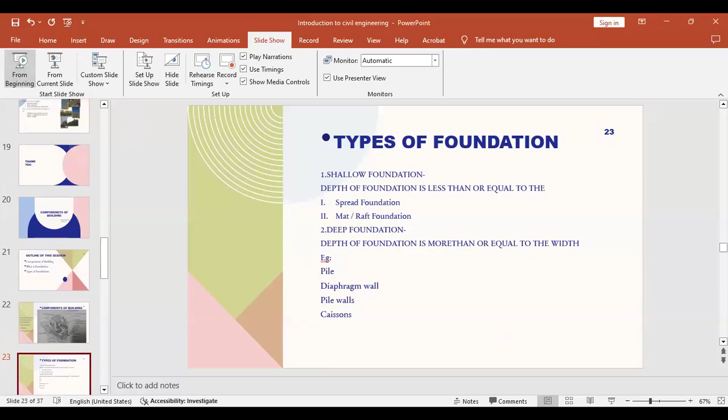Our topic is the introduction to civil engineering. In this class, I need to take two sessions. In the first session is the introduction to civil engineering.

Please mute. The outline of this session: here I am going to cover what is engineering, what is civil engineering, and branches of civil engineering.

Engineering is the branch that is the continuation of the physics, chemistry, and mathematics that we studied in +2.

In this engineering, Robert E. Dory, as per his opinion - he was an electrical engineer and AIEE medal winner, that is American Institute of Electrical Engineering - worked in 1909. As per his opinion, engineering is the art based primarily upon training in mathematics and physical sciences, utilizing economically the forces and material of nature for the benefit of man.

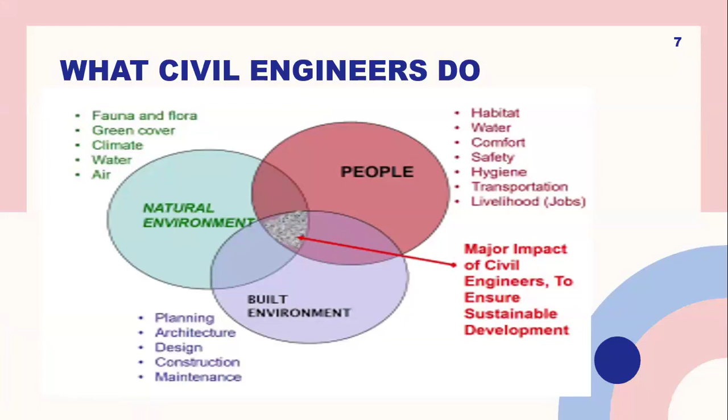So these are large structures. They add 520 kilometers of coastline to that of Dubai. The first two islands used 100 million cubic meters of rock and sand. So in the sea, islands are constructed and these islands have become building houses, hotels and so on. Civil engineering is so powerful that you can create land for living, in this case in the sea, where there was no land.

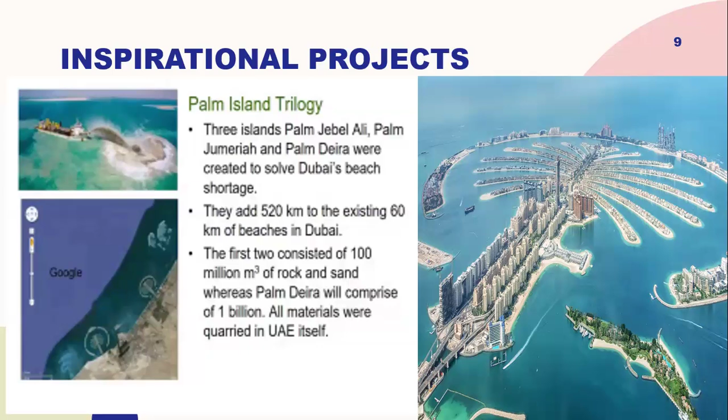Another example is Burj Khalifa and many others. We don't have enough time to explain them, so we are going to the next part of our session.

In the introduction of civil engineering, I explained the requirements and the need of civil engineering. Then in civil engineering, nowadays several branches are offered. The main specializations or main branches of civil engineering are: environmental engineering, geotechnical engineering,

Environmental engineering explains how we interact with the environment and how we should take care of it. These are the things that happen in environmental engineering.

The next one is geotechnical engineering. It covers the soil and the ground. Next is hydraulic and water resources. This deals with the flow of water, how we can control, save, and utilize water more efficiently.

Then the next one is construction material and technology. They look at what is used in construction, what technologies are available, and how construction is carried out efficiently.

Next one is structural engineering. This is a core paper of civil engineering. Structural engineering deals with the design and analysis of structures that we want to construct. It is very important in this stream.

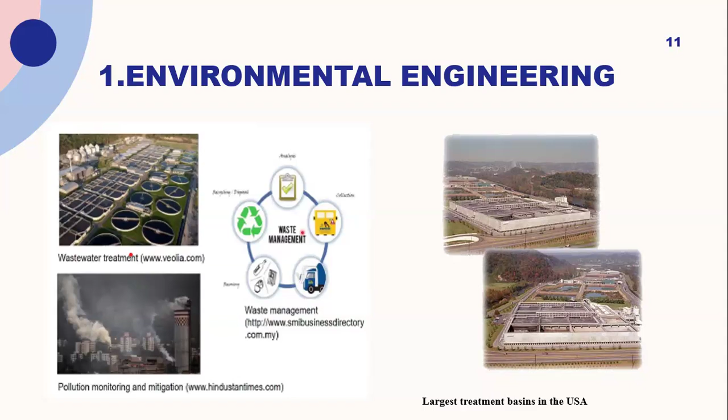In environmental engineering, all this is aiming to protect and improve the natural environment. It draws upon basic sciences like chemistry, biology, and fluid mechanics, because these are the sciences required

for designing and operating the systems that have to be built for providing drinking water and for treating waste, municipal as well as industrial waste. Depending on where the waste comes from, treatment may be different. We have to see how the contaminants can be treated or handled before the treated waste is sent back to the environment.

This also brings up the importance in civil engineering of knowing chemistry.

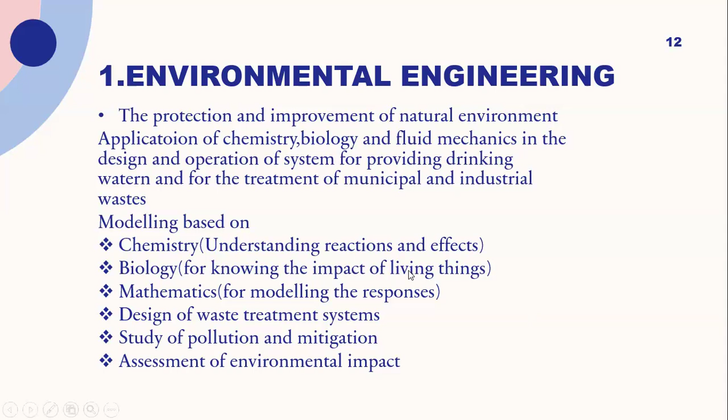Anyway, we have to understand the soil, we have to understand the rock, and we have to see how to make this tunnel safe. We are drilling and boring, and also during its life, it has to be safe enough and should withstand the pressure of the earth around it and the movements and so on.

And whenever we have a large building or a high-rise building, you need a strong foundation. I want to explain about the aspects of geotechnical engineering. First, I just mentioned tunnel engineering.

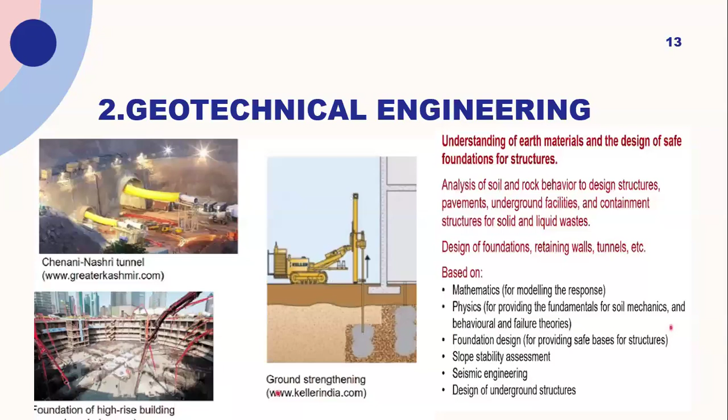Now I want to explain hydraulics, the water resources engineering. There are large structures like dams that have been built over the course of history. We still build large projects involving dams where water is stored for irrigation purposes, drinking water purposes, and also to generate electricity. It is one of the cleanest ways to generate electricity.

We have several large hydroelectric projects which provide pressure due to the buildup of water that can be used to generate electricity. These are all massive projects because they involve making a huge reservoir that can collect the water, and the impact on the environment and people is tremendous. So they have to be done properly and safely.

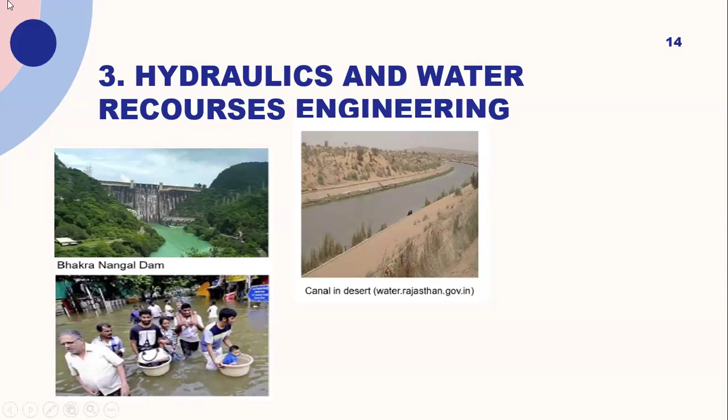We can come to the area of construction. Construction involves resources, materials and processes. So the people who are involved, the construction materials experts, have to decide the material to use, how much to use, and how. This is mainly a kind of management - construction working, material management, and time management.

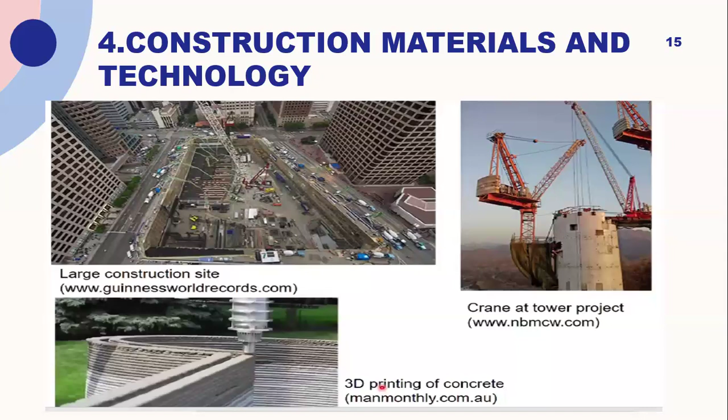So we do not need a mold or a form work - you can just pour the concrete and it stands up in the required shape of the structure. This was coded before - this is being done in polymers. In this type of concrete 3D printing, it is also being done with metals and some other kinds of materials. It is a new technology of construction based on reducing manpower and construction time in an effective way. I think all of you have heard about this technology of 3D printing.

The next stream of our branch is structural engineering. When we have to design the structure, we have to look at the people who take care of the foundation and people who have taken care of the material and processes. Now we have to design a structure - like this high-rise building or this bridge across the Yamuna River in India. This bridge is a cable stayed bridge, where we have a deck over which traffic is flowing, but the deck has to be kept across the river, and we have cables which are holding it up. These cables are tied to this huge tower, which is above the bridge.

We can have a steel bridge as well. This is very elegant. The next example is the Howrah Bridge, another bridge in India, Kolkata, which shows an entire steel bridge—it is a skeleton structure, steel that is holding it up.

These are things which are very impressive. They could be tens, if not hundreds of meters tall or long, and they have to be designed in a safe way to last for a long time. This is what the structural engineer does: analyzes the forces, stresses, and deformations, and

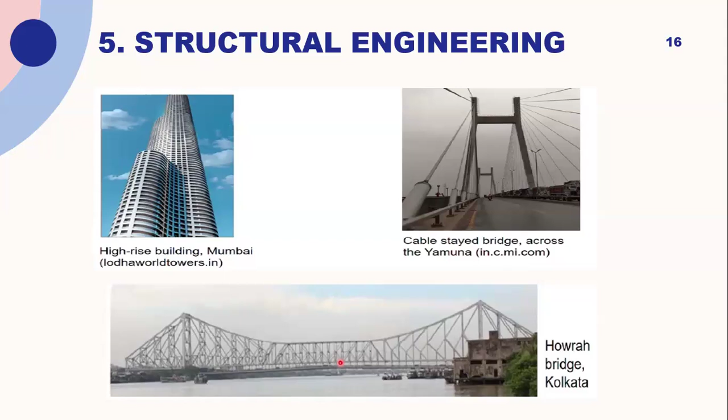And when they last, we want to make sure it is functional. Next stream is transportation engineering. Transportation engineers design and analyze highways, railways, airports, urban and suburban road networks, parking, and traffic control signals.

It is very important—there are different modes of transport. In every nation we have a national highway network where several thousands of kilometers connect different corners of the nation. Similarly, roads provide modes of transport, and waterways also provide a way of transport. Canals and waterways are a mode of transportation because we can transport goods very easily and cheaply by waterways, without competing with the transportation of people. This could be a mode dedicated to the transportation of goods.

Airport construction in remote, hilly areas is difficult to do, but it is important for providing a network for moving people, moving goods, and keeping business and life going.

Next stream is construction management. Construction managers mainly review contracts, order materials, hire and schedule subcontractors. Their job is to provide quality control and ensure the project is completed on time and within budget. Time, schedule, and budget are very important in this area.

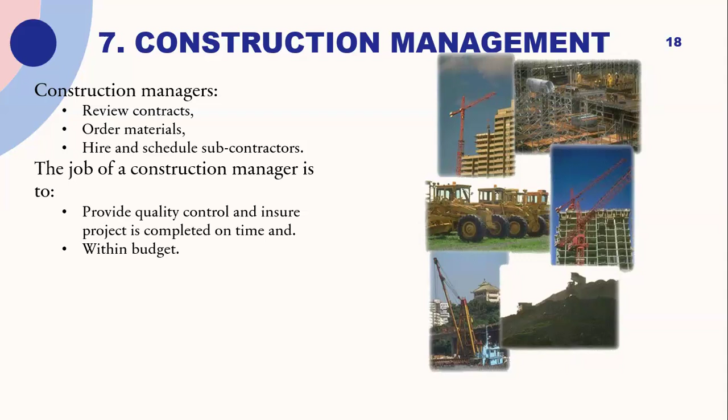In this session I completed the main areas, introduction and main streams. In the second section, I want to cover a small area: the components of buildings, because civil engineering is really connected with building construction. I want to explain some points—components of a building, what a foundation is, and the types of foundation.

Mainly a building consists of three parts: first is the foundation, second is the plinth, and then the superstructure. We can see this figure—this area is the plinth. The area below the ground level is called the foundation, and this is the floor level.

Can you see in this figure? This is the floor level of a building, and this is the ground level of the building. This height is mostly 45 or 60 centimeters as per the requirement of the building—this is the plinth area. The part of the building below the ground level is called the substructure, and the part above the ground level is called the superstructure.

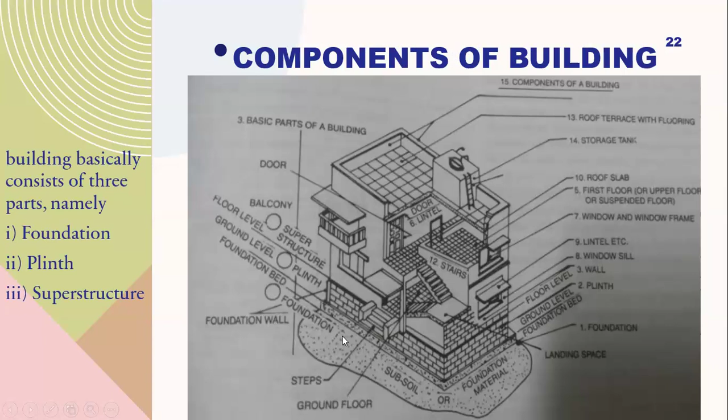Now we can explain in this session the foundation. Foundation is mainly of two kinds. The first one is the shallow foundation, the second one is the deep foundation. Shallow foundation is the foundation with lesser depth. Its definition is: depth of foundation is lesser than or equal to the width of foundation.

The types of shallow foundations are spread foundation and mat foundation. The deep foundation means the depth of foundation is more than or equal to the width of the foundation. Pile, diaphragm wall foundation, pile walls, and caissons are examples of deep foundation.

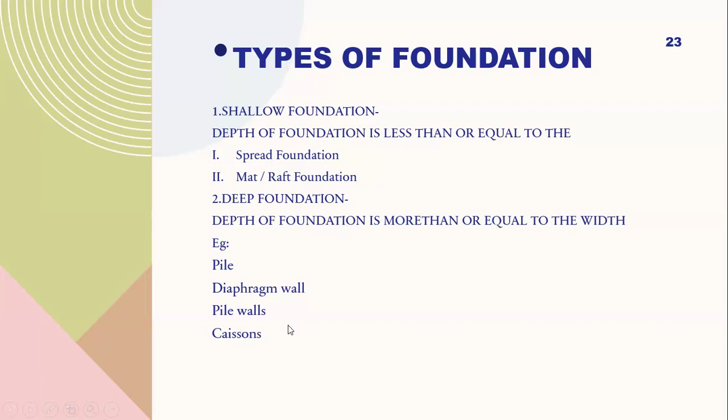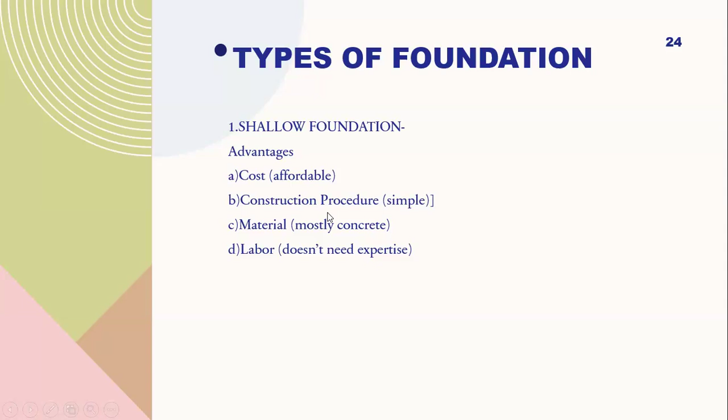The advantages of shallow foundations are: cost must be affordable, its construction procedure is simple, mostly it is concrete, and it has lesser labor requirements.

This is the example of shallow foundation. This is a spread footing, also known as footing. It is the enlargement of the bottom of a column. This is the column - this vertical load bearing member is a column, and this vertical load bearing member is called a wall. If the column type structure is shown like this, this cuboidal or rectangular area is known as the footing. It is the enlargement of the bottom of the column. This foundation transfers the load from the column to the soil below it.

And this is load bearing. This is the spread footing. The load from the wall is transferred to the soil by this foundation.

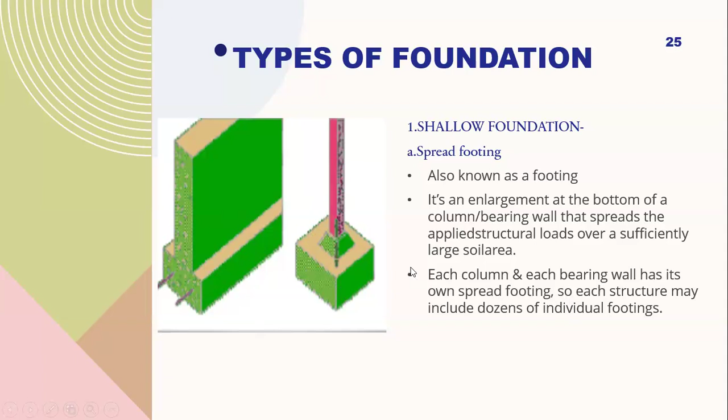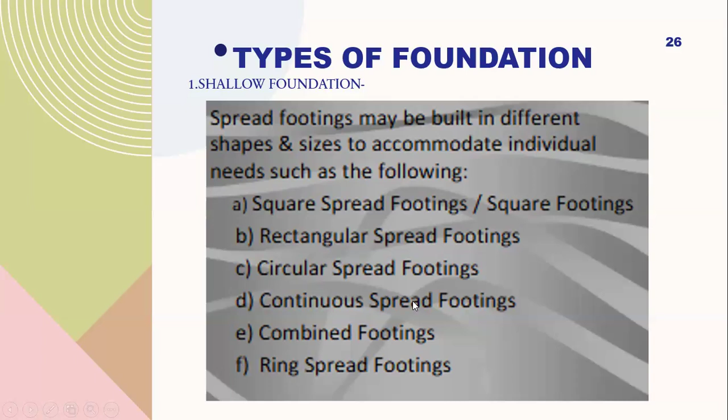Spread footing may be built in different shapes and sizes: square spread footing, rectangular spread footing, circular spread footing, continuous spread footing, combined footing, ring footing. This is a square type foundation - this is the column and this is the foundation.

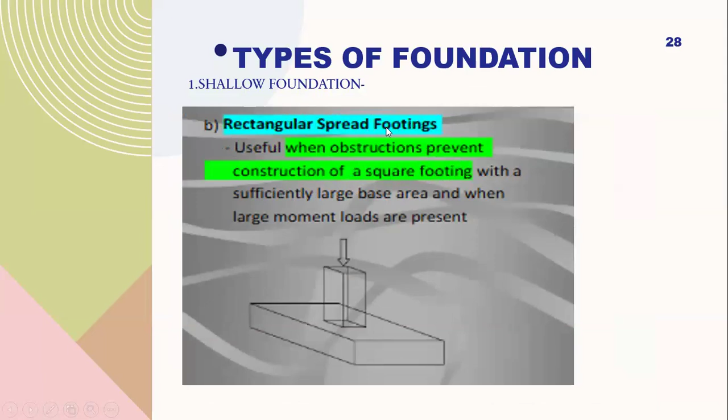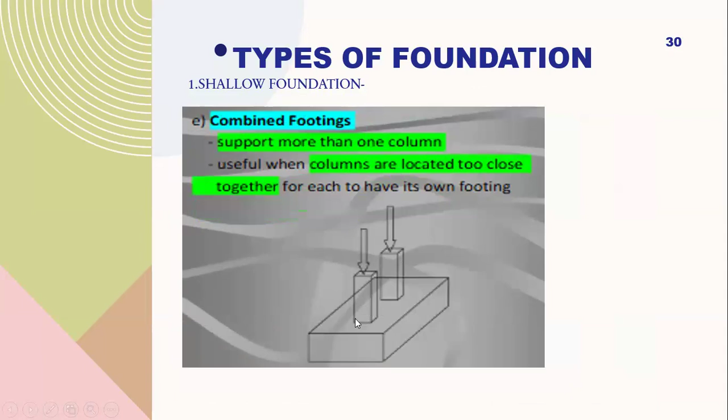Here two columns are supported by a combined rectangular area. Next one is the ring footing - this is a concrete ring foundation, and the load is transferred through this ring.

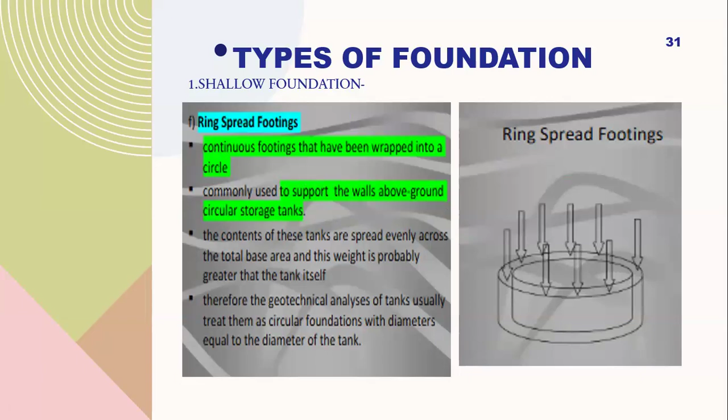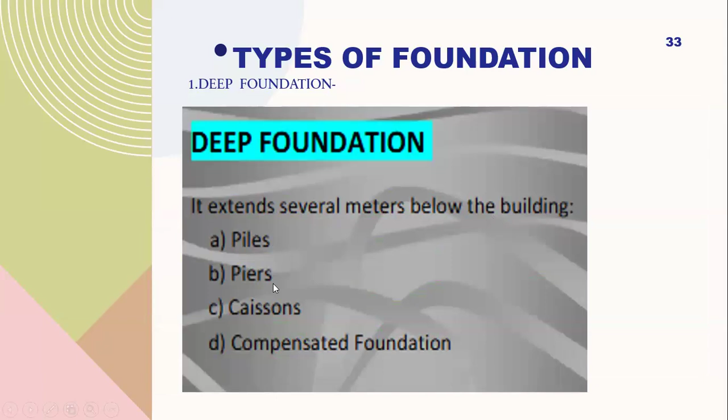Next one is the deep foundation. The examples are piles, piers, caissons, and compensated foundations. These are the piles - slender or structural members consisting of steel, concrete, or timber. These shown in this figure are the pile foundations.

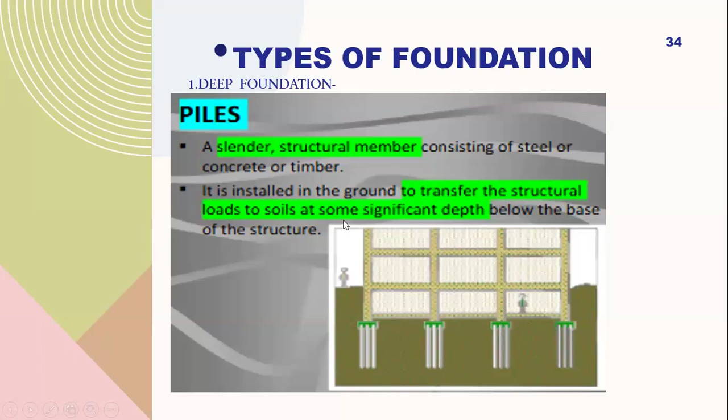This transfers the structural load to a significant depth below the structure, below the building. Pile foundation is used when the soil near the surface does not have sufficient bearing capacity. Bearing capacity means the ability of the soil to withstand the load and support the structural load. It's also used when the estimated settlement of the soil exceeds the tolerable limit.

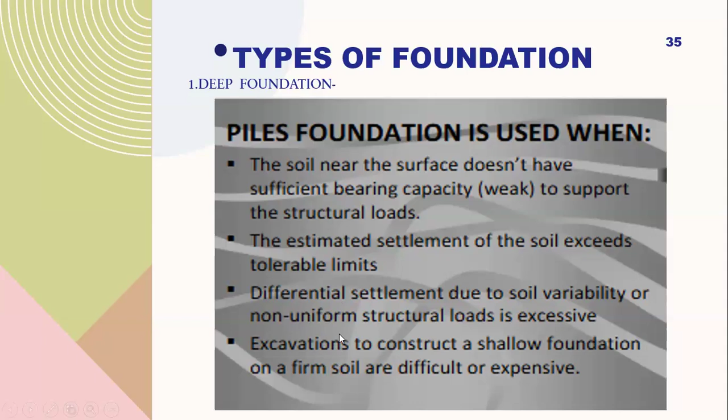Pile foundations are used when the soil below the foundation is very weak, or when there is differential settlement due to soil variability. These are the two types of pile: this is the end-bearing pile and this is the friction pile.

For the end-bearing pile, this is the rocky area, our building area is here, and our ground level is here. This area is weak soil, and under a certain depth we find a strong area. This pile is ended to this strong area. The pile transfers the load to the soil layer under the ground, such as rock, gravel, or very dense sand. This end is bearing on a strong area, so it is known as an end-bearing pile.

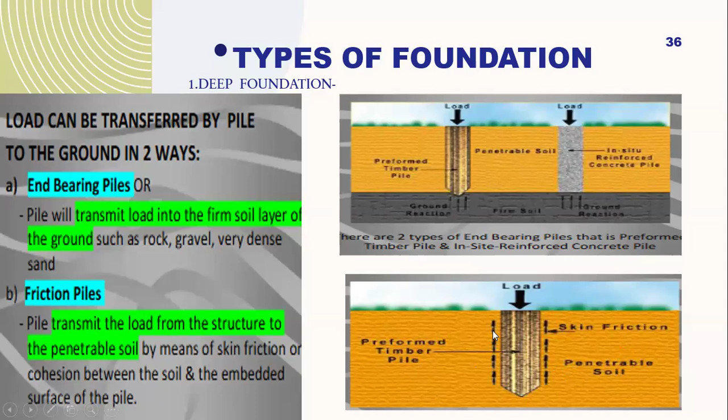Next one is the friction pile. Here the rocky area is not found under a certain limit of depth. This pile rests on the soft or weak soil by its skin friction. The pile transfers load from the structure to the penetrable soil by means of skin friction or cohesion between the soil and the embedded surface of the pile.